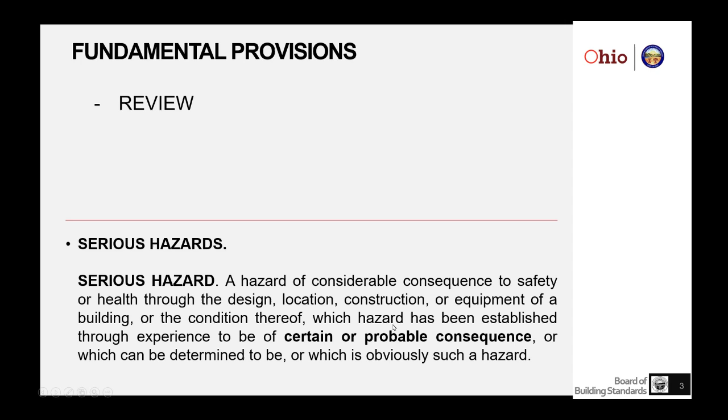Now, when we talk about serious hazards, we're going to have images that dance in our heads. We've shown a few of those examples, some of which some of you may have felt were a serious hazard, some of you may have felt they weren't. And if it's not a serious hazard but you're still concerned, we indicated that there is a tool you can use as part of the resource packet, both residential and commercial. It's called a notice of recommended change.

It's a notice of recommended change that says we've identified something that hasn't moved up to the level of a serious hazard. It might in the future. We want to put you on notice that this exists in your building, and we'd recommend you make these changes. We want to go on record as having noticed and notified you so that you understand the burden is now in your lap to address.

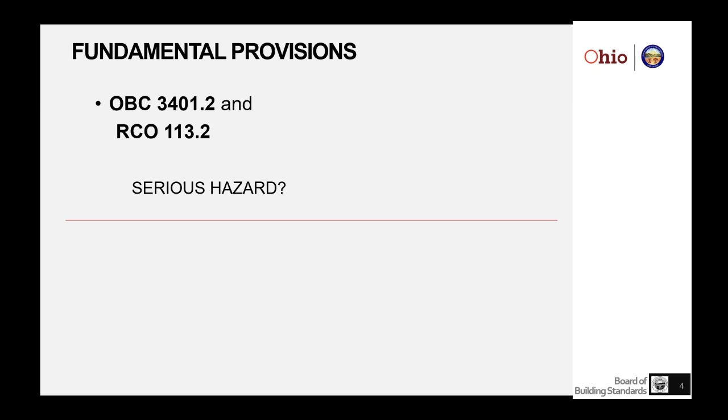Now, many things appear to be a serious hazard. Certain things are pretty obvious. If we know things about that, this may be a serious hazard. Sure looks like it could be. I have no idea what this is. And as an inspector, you probably wouldn't either.

We know that there are several feeds into this box, and it doesn't conform, depending on where it is, if it's energized, what it's used for. This would probably at least deserve a notice of recommended change. That's why inspectors, your cameras are important, and all this information needs to feed back to the building official so the building official can make a call.

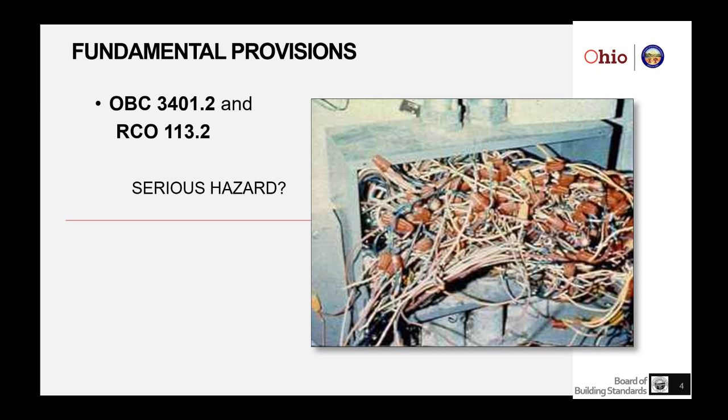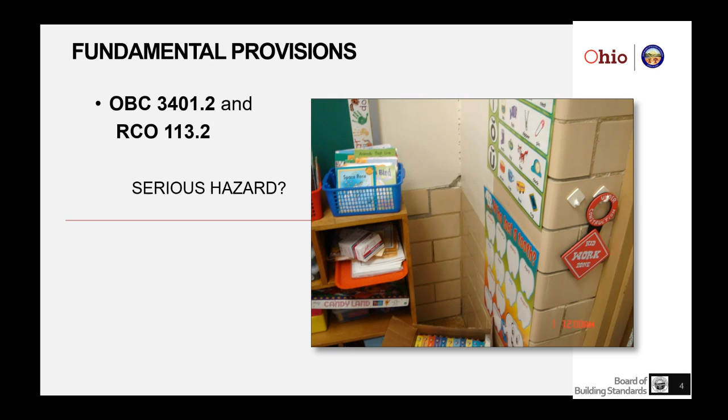You may be walking through a building and notice some pretty severe structural cracks and shifts. It may need some more investigation. Again, photographing some of these things, it may be a serious hazard, or it may reflect a condition that's already been addressed. It may not. And ignoring that could put the building department at some level of risk if it was noted, if it was discussed. So documentation and investigation get to be really important.

There are parts of a property that are outside the scope of the building code. Parking lot lighting, for instance, is not something we regulate. If you notice something, you may still wish to notify the owner of a condition that could be hazardous. This pole could be energized unintentionally and someone could be electrocuted. So there are things outside the scope of the code that could be hazardous that we may want to notify someone of, but we don't have the jurisdiction to issue orders.

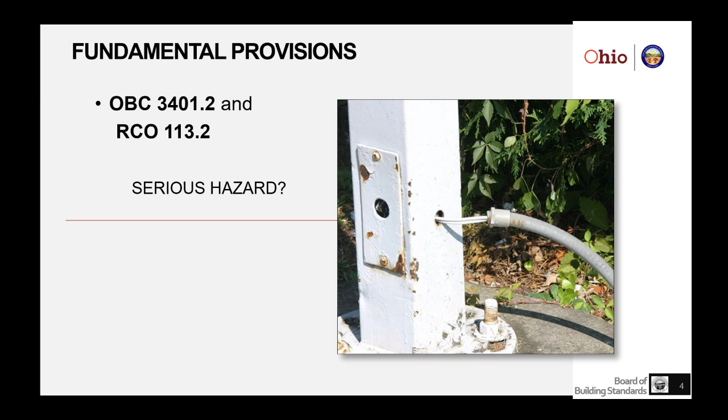There are things you're going to see in older existing buildings. This, for instance, probably should be insulated if it was new construction. You're going to see a lot of water staining and water damage. Depending on the extent of the damage, it could be a serious hazard, or it may not be. It may warrant a notice of recommended change. These are the kind of calls the building official is going to have to make every day. And you, as the inspectors, need to inform the building official.

It looks like those two vertical framing members are newer than the other framing members. Some work may have been done here for a reason. It may mean additional investigation is necessary to make a determination of whether there are serious hazards.

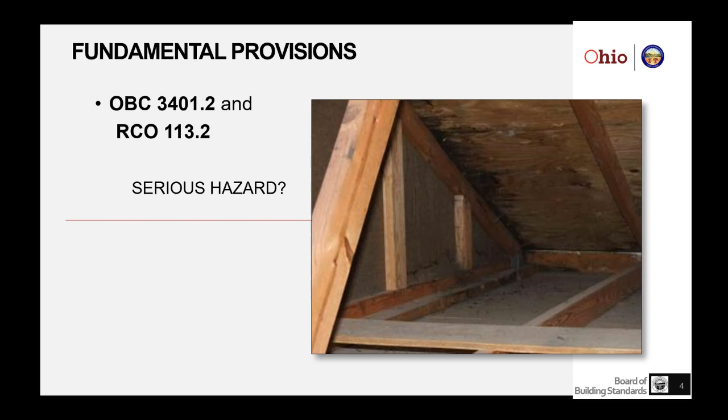There are all kinds of creative tradesmen out there, people who like to play electrician or mechanical contractor or structural contractor. But when we see these things, we need to document them, not ignore them, and in discussion with the building official, determine a course of action. No box—we don't know what voltage this is, we don't know what it's supplying, we don't know what the green wire is, though we know what green normally is and where it's going. Just too much information that's unknown. It may be that an order is issued, but it may be that there's a notice of recommended change, depending on the information we gather.

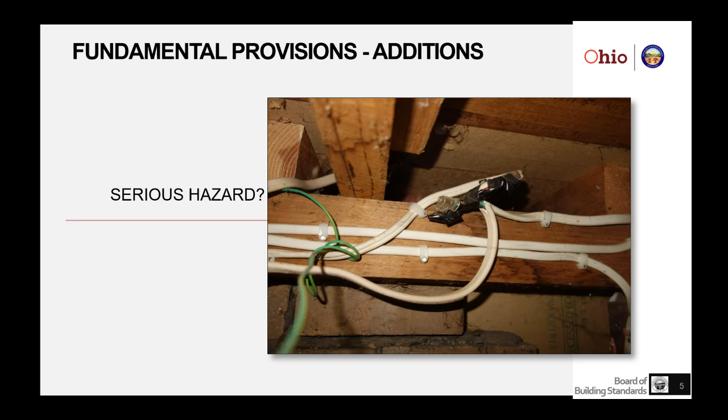Now, we want to start talking about some of the specific provisions in Chapter 34.

When we're dealing with building materials and systems, there tends to be a little confusion, and we just want to make sure you understand that existing materials can remain unless they're dangerous, unless they're damaged, unless they cannot function as they were originally designed—and then the owner needs to maintain, which may mean a repair or a restoration. But existing materials can remain.

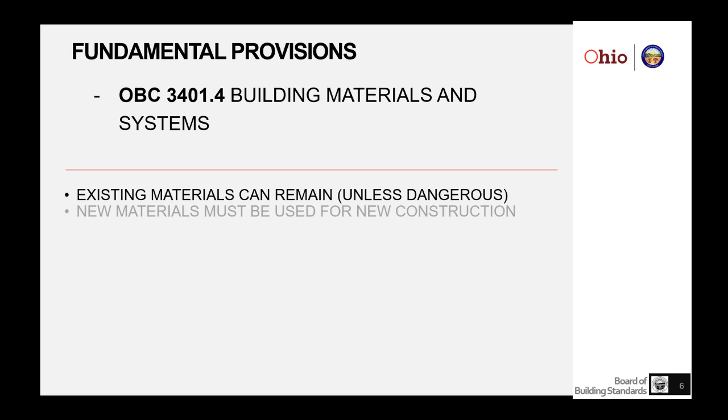Also, when there's new construction, new materials should be used. There are some provisions for used materials—if they meet the requirements for new materials, they're not hazardous. And the building official really gets involved here. Now, there are not many building officials that want to make a call on whether old materials comply with new material requirements, but understand that they can be used, though there's an approval process, and there has to be a determination by the owner or the design professional that they meet the requirements for new materials.

That's very difficult to do, but it is actually spelled out in 3401.4. Also, another issue that comes up periodically is lead paint and asbestos.

Now, some old homes and a lot of factories and older buildings will have asbestos in different places. They most likely have lead paint, but those are within the jurisdiction of the Ohio Department of Health and Ohio EPA. So if you run into a lead paint issue, turn that over to the Ohio Department of Health, or find out if your local Department of Health has a lead abatement program.

Contractors that do that work must test and get licensed to dispose of some of those materials. Same thing with OEPA and asbestos. That's not something we enforce. We can notify agencies of that type of work in existing buildings, but do not enforce the provisions of those other agencies. Sometimes that comes up and people don't know where to direct an owner. So just noting this, that for the lead paint, there's a lead paint program at Department of Health, and the asbestos abatement program at OEPA.

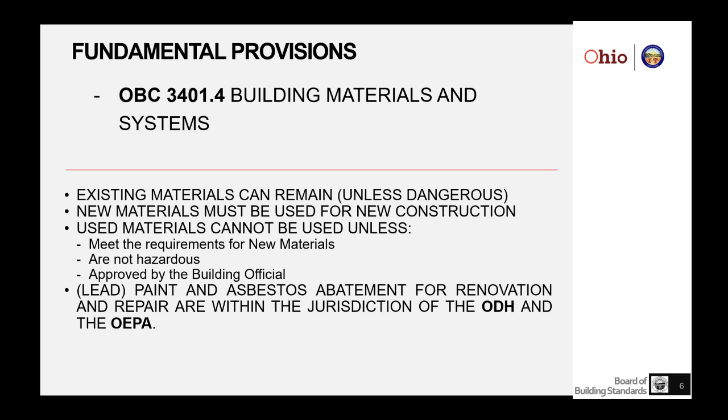I would also want to mention this: this is the only place the International Existing Building Code is referenced. It is used because there are some provisions in it that allow us to use that code, section 721, to determine the fire resistance rating of existing materials, these archaic and older materials. Designers can use that section to determine a fire resistance rating of assemblies and materials in existing buildings, and then come back. The design professional should, if they want to use existing clay tiles or ceramic tile wall assemblies in older buildings, go to 721 and use that section to determine the fire resistance rating of those existing materials.

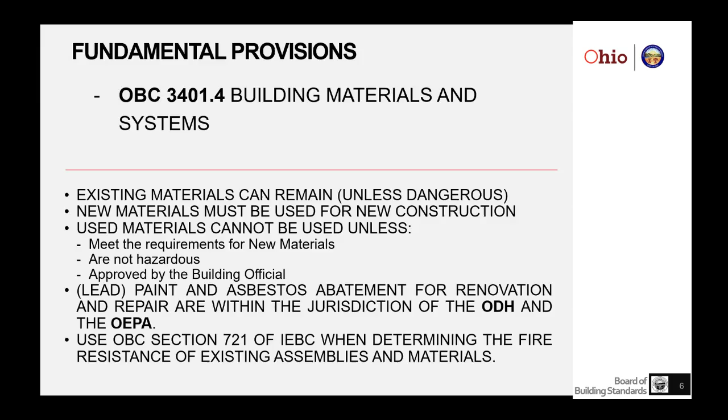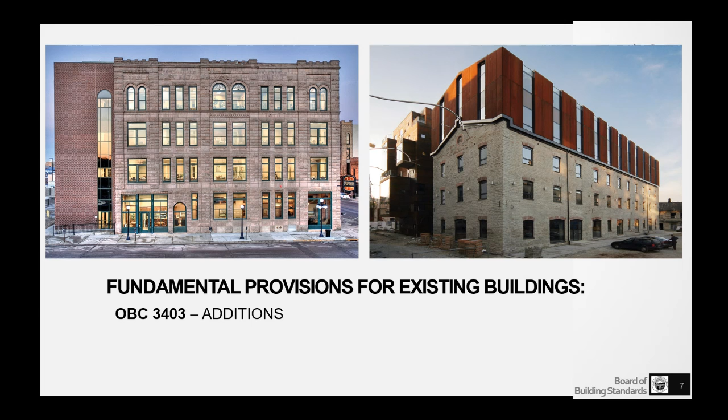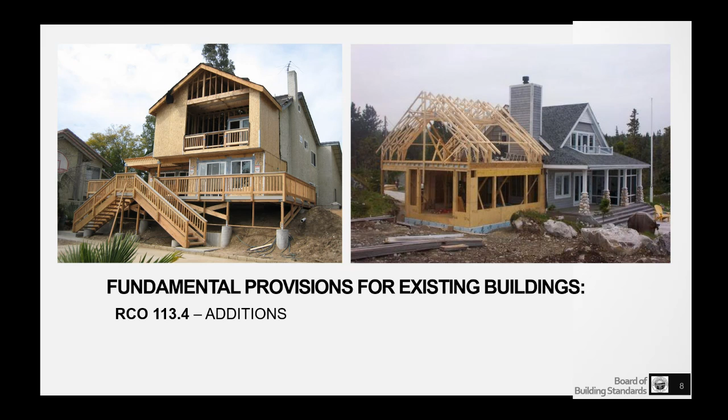And on the residential side, typically we see additions that are structures built adjacent to and added to an existing 1, 2, or 3 family dwelling. So this is what we're talking about in either 113.4 or in 3403 when we're talking about additions. So let's talk about that for a minute.

Existing buildings, additions. Both codes require that alterations and renovations in and additions to existing buildings comply with the current code, because that's new work. Those renovations and additions have to comply with new construction requirements because it's new work. And in an alteration, the code applies to the extent of the alteration, meaning only the new work has to comply.

That may mean, as odd as it sounds, that if I put in a wall section where I've removed one, and currently that corridor would have to be built as rated, that piece that gets put in would have to be done as a rated assembly, even though all the walls may not have a rating, or be of an archaic material that it's hard to determine the rating.

And remember, the concept of progressive compliance: over time, as more and more of that building is altered, more and more it will comply with more modern building codes. Additions, however, have to be made to assure that the existing building with the addition added on aren't less conforming with the code than before the addition.

And it gets really tricky when an addition covers an existing required means of egress. That path of travel has to be maintained. Travel distances have to be maintained. So the existing building can exist unaltered, doesn't have to comply with the current code, but that addition and that existing building can't be less conforming with the code than before the addition was added. And that, again, isn't a conflict with progressive compliance - what it is saying is that we can't make that existing building less conforming.

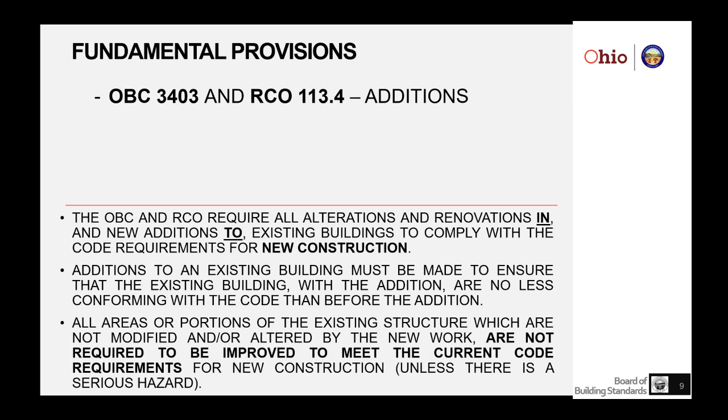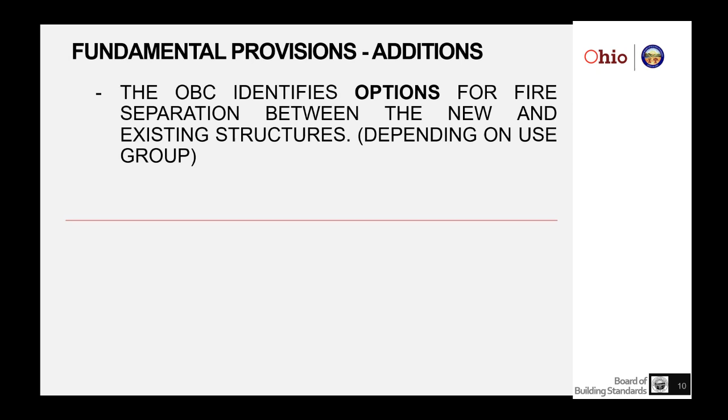Now, an owner has options, and we want to talk about some of those options. When we have an addition to an existing building, the options are varied. They can put a legitimate firewall in, and that is a structurally independent 3-4 hour wall that will stand even if the structure on either side collapses. It's a legitimate firewall - we've created a separate building, and we'll deal with that separately.

The owner can also just put in fire barriers between the existing building and the addition. Now, if they choose not to put a fire barrier in, there's no separation.

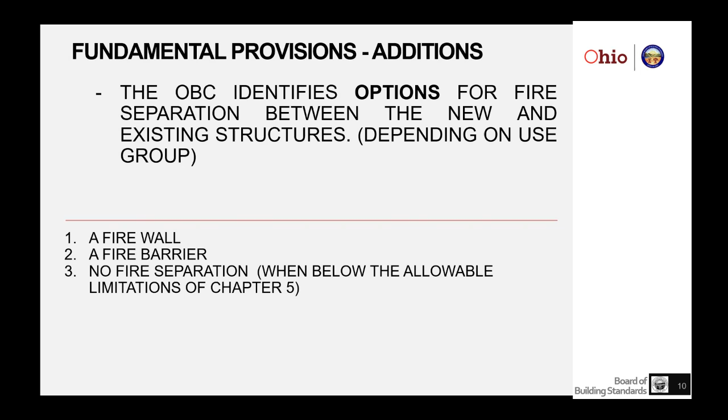When the allowable areas aren't exceeded, that one fire area may have to be treated as a single unit. Remember, this is complicated because of that old definition that was put in law of what a workshop or factory is. So we had to come up with a way of dealing with an addition to any of these types of occupancies, A, B, M.

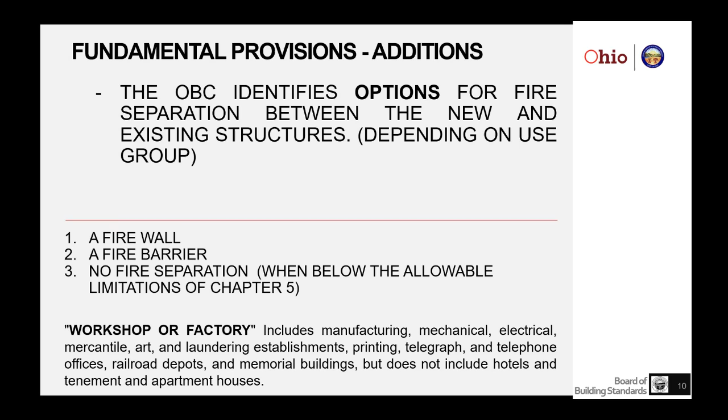That would allow us to put an addition on and not impact the existing building. So it was done in a very specific way in 3403 for additions, and you'll see in that section some Ohio language that was generated to make sure that our provisions for additions conform to what the legislature did in the law.

So what you'll find is a fourth option that says the combined height and area of the building, the existing building, and the addition will be used to determine the construction type of the addition. And the construction type of the addition must be increased to a type that is within Chapter 5 allowable height and area.

I will do something that the model codes have never allowed us to do, and that's mix construction types. But to make the existing building no less hazardous, we will count the height and area of both the addition and the existing building, enter the tables, and find out if the allowable area—we'll find out which construction type that area drives us to.

Given that we might have an open area perimeter increase, a sprinkler increase, we'll use those tables to find out what construction type could be built of that size, and then apply that construction type to the addition. Now that's for all the building types except sleeping occupancies.

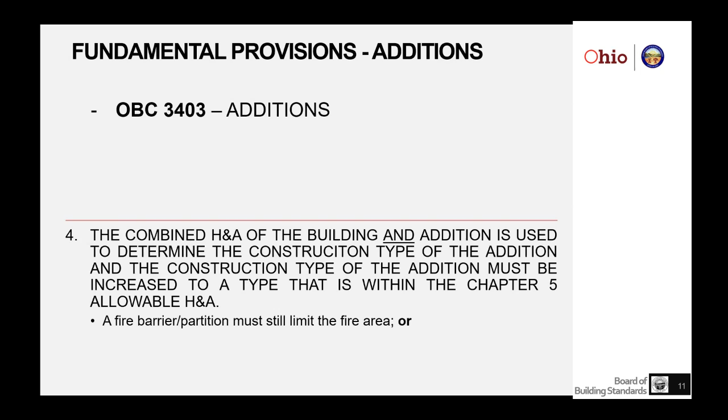We could put a fire barrier partition to limit the fire area, we may put an automatic sprinkler system in the fire area. And if the fire area extends a little bit into the existing building, that fire area must be suppressed. And we would put that sprinkler system in if the addition and the area of the existing building exceeds the Chapter 9 limits, but we will put that fire protection system in the addition.

And if the code requires it to be sprinklered throughout, that would be considered a building that was sprinklered throughout, and I can get the increases that the code provides for buildings sprinklered throughout. This is the only way we can comply with both the law and the model code's based code requirements.

Now, for those additions, when the height and area of the building and the addition is below the allowable height and area in Chapter 5, but it creates a fire area greater than the limits in Chapter 9, one of the following has to happen. So I don't have to change construction type, but if the area creates a fire area greater than the limits in Chapter 9...

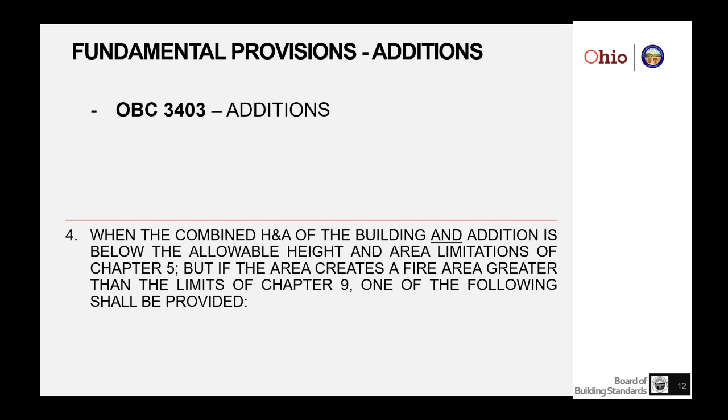I'm either going to have to put a fire barrier in to limit the fire area, or I'm going to have an automatic sprinkler system for the fire area that exceeds Chapter 9 limits. So we're still maintaining a level of safety. We haven't made the existing building less safe. And remember, we're going to have to preserve required exits, travel distances, all that kind of stuff is going to have to be maintained. This is dealing with just construction type and some of the requirements that apply.

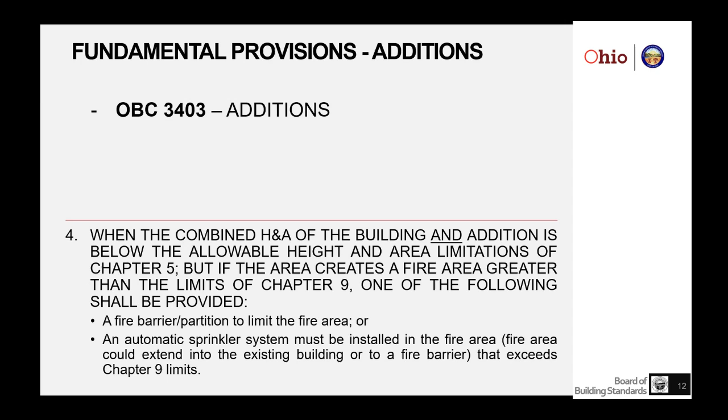Now, Steve, yes, quick question here. From Eric Shaver, who writes...

3408.1: if a building is required to comply with Chapters 3 through 13 and 14 through 33, can OBC 3411 be used to meet the accessibility requirements? Let me read that again to make sure I get the right sections. OBC 3408.1: if a building is required to comply with OBC Chapters 3 to 13 and 14 to 33, can OBC 3411 be used to meet the accessibility requirements?

That's 3408, that's change of occupancy. Right, and he said 3408.1. Right. Let's see, being directed back into the current code.

Well, first, in that section, the first thing you have to do is you're going to have to do an evaluation to determine if it's more hazardous or less hazardous. So we'll talk about that in a minute, but it's not automatic. You go to 3412 or some other way of determining whether it's more hazardous. And if it's more hazardous, Chapter 3408, the specific requirements for change of occupancy are going to send you out.

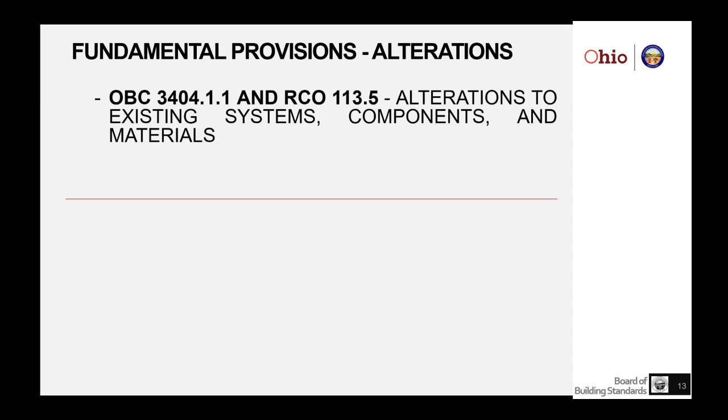There's also provisions in 3404 and the residential code that deal with systems, components, and materials. This is the building systems: HVAC, mechanical, electrical, plumbing. There are provisions in the code that allow the same provisions for systems, components, and materials as allowed for existing buildings, so you'll come over to the existing building code.

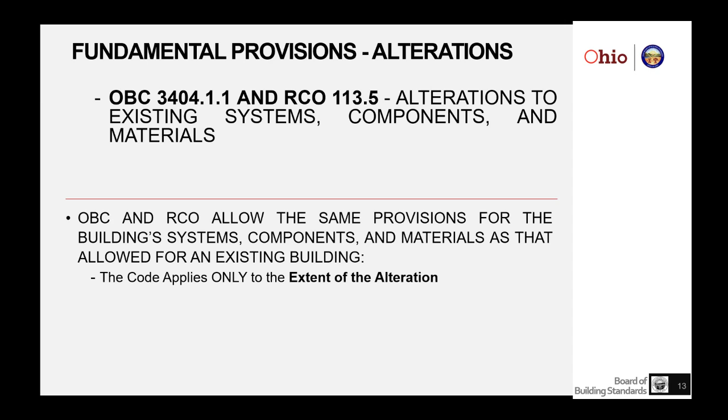Remember, the code applies only to the extent of the alteration. So it depends when we're dealing with alterations to existing systems, I'm going to apply that to the new work. The portions of the existing system which are altered or affected by the alteration are required to meet new code. If I have a heating appliance that cannot handle that increase, I may now be required to do something in addition to adding to the mechanical system. Same thing with electrical systems and circuits, again, to the extent of the alteration.

Not more hazardous than existed, and if the systems, by meeting the new code for the new work, can be deemed safe and sanitary. Again, it's a judgment call. The building official is going to have to be involved.

Repairs and maintenance are only required to be done with conditions of existing approval and the system isn't less safe. So repairs and maintenance are going to be treated a little differently. That's not necessarily an alteration, not necessarily extending the system. So depending on the extent of the alteration, maintenance and repairs are going to be dealt with differently.

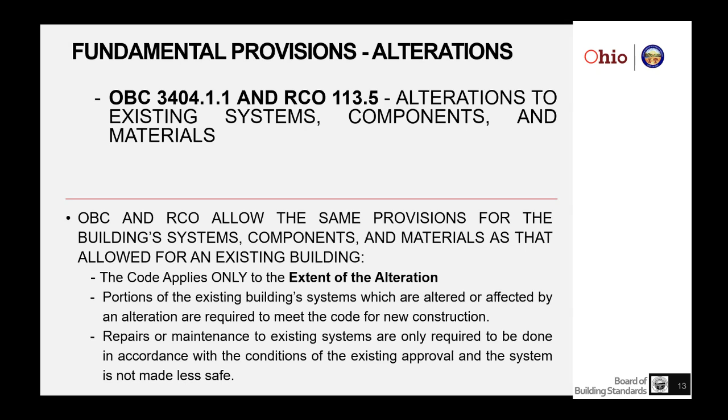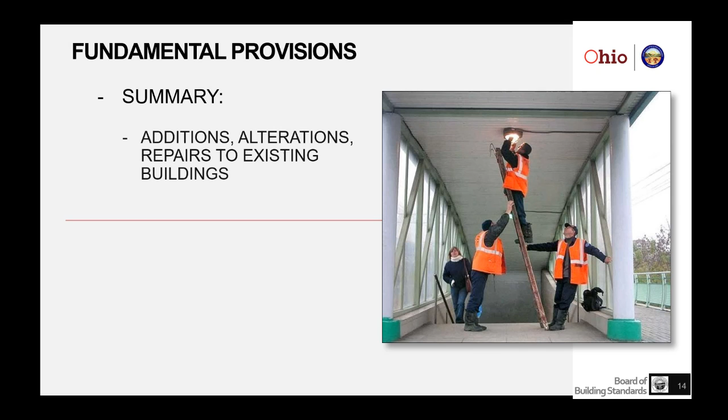Now, in summary, for what we've talked about so far, you can't protect people from stupid, but you can help them understand what the code requires when dealing with additions, alterations, and repairs to existing buildings. The basic premise is that things that are not modified, not altered, are not required to meet the current code unless there's a serious hazard. That's the byword when it comes to additions, alterations, and repairs to existing buildings.

Not required to meet the current code. They are required to be maintained. When maintaining those is impossible and new systems have to be installed, that's an alteration. But in any case, when there's a serious hazard, it's required to be remediated, and it can be restored to the previous condition it was in. It doesn't necessarily have to comply. It has to be made safe.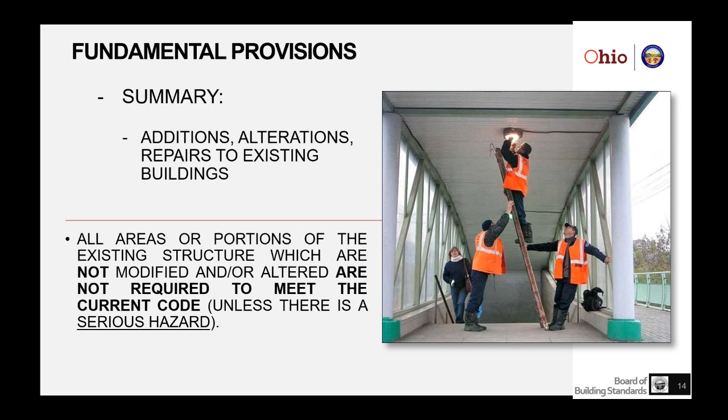Now let's talk about the complicated one, the change of occupancy. I don't know how good a job I'll do here, but I want you to understand specific things about change of occupancy, especially as we have to deal with that, almost one of the major changes that happens in existing buildings. It's the most difficult. A change of occupancy is a change in the purpose or level of activity. We talked about that before, this is a review.

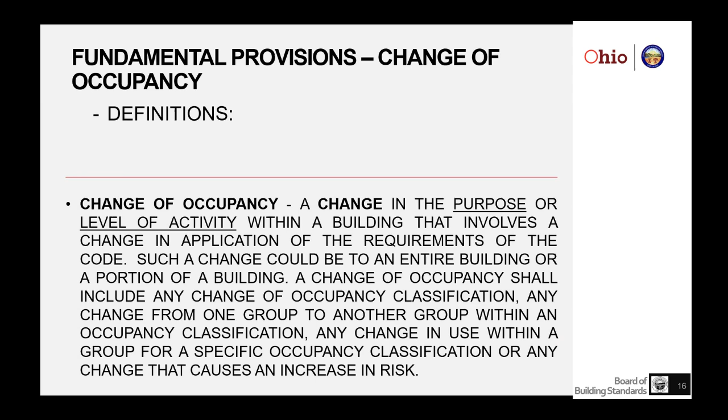There can be different types of change of occupancy: a complete change of occupancy, or a change of occupancy which would create a mixed occupancy situation that didn't exist before. The code makes it clear that a change of occupancy of an existing building or space is permitted without having to meet all the requirements in the code, provided, and this is the evaluation that has to be made, the proposed use is not more hazardous than the existing use, and you need to do an analysis.

We recommend or suggest you use 3412 to do that analysis. You may have an engineer do that analysis, or some other professional do an analysis to say is this occupancy more or less hazardous. For you building department people, you can read out of the code through its tables and charts what is considered more hazardous. If you go into the height or area table, and you see that one occupancy permits less square footage than a different occupancy with the same construction type, you know that's a more hazardous occupancy.

There are ways of reading out of the building code to determine whether a change to another occupancy is more hazardous than an existing occupancy. This provision would require that those increases in risk be addressed. If the proposed use is more hazardous, such buildings shall be made to comply with the requirements of sections 3 through 14, with 3412 as the only option. Doing that analysis is helpful, because you may do all the work needed to prevent having to go back to sections 3 through 14.

You're back, yay. Did that... when did I get dropped? You completely froze about a minute ago, and your program is no longer loaded. Yeah, and we're broadcasting live right now. Let me share this for you. Get it? Yep, got it, your program is live. All right, I don't know if we left off here or not, but we'll start here. Go ahead, you there? You are live and broadcasting. All right.

One of the things that is difficult is accessibility provisions, and we're not going to be able to do a deep dive here, but I do want to go through some provisions in the existing building chapter that deals with accessibility, because there are some real issues that come up. It scares people, they don't want to deal with it, and unfortunately this prevents them from adequately enforcing accessibility provisions. The federal government realizes that when it comes to existing buildings, there is a level of reasonableness that is different than Chapter 11 for new construction. So I just want to touch on some of the highlights so you understand how the rules address special conditions that exist in existing buildings.

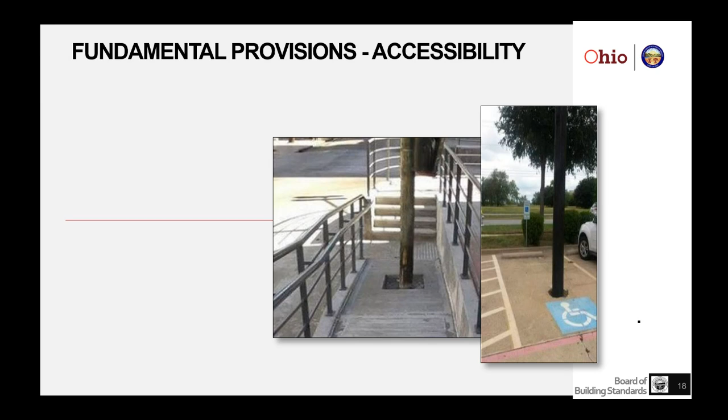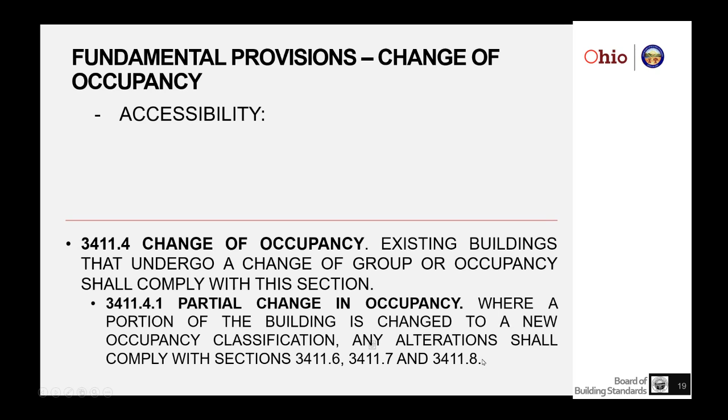So first, we're talking about accessibility. We have to deal with a change of occupancy. That's probably one of the most difficult areas when dealing with accessibility. The code says there are a couple types of change of occupancy: there's a partial change of occupancy where a portion of the building is changed, and there's an entire change of occupancy. I want you to notice these three sections, 3411.6, 7, and 8 - they are critical to understanding how to apply accessibility requirements for existing buildings. Keep that in the back of your mind. Not only a partial change of occupancy, but there's also a complete change of occupancy, where the entire building undergoes a change.

It's going to comply with 3411.4.1 and shall have all of the following features. Once we have an entire change of occupancy, the entire building has changed, even if it's an existing building, there are some things it's going to have. Even then, the accessibility requirements give you some leeway, but follow this, pay attention here, and I think it'll be helpful. First off, if it's a complete change of occupancy, then the building has to have several features.

One is at least one accessible building entrance. Look, they're gutting the building - they should be able to provide one accessible building entrance. This can be complicated if you're in, say, Over-the-Rhine in Cincinnati, or German Village, with narrow sidewalks, stone lintels and thresholds. There are some challenges, but when you're gutting a building, when you're doing an entire change of occupancy, there is an assumption that you have at least one building entrance.

There will be one accessible route from an accessible building entrance to the primary function area. Now, we need to remember we talked about primary function - we'll talk about that again a little bit. I've got to be able to get into the building and get through the building to the place in the building that it was built for.

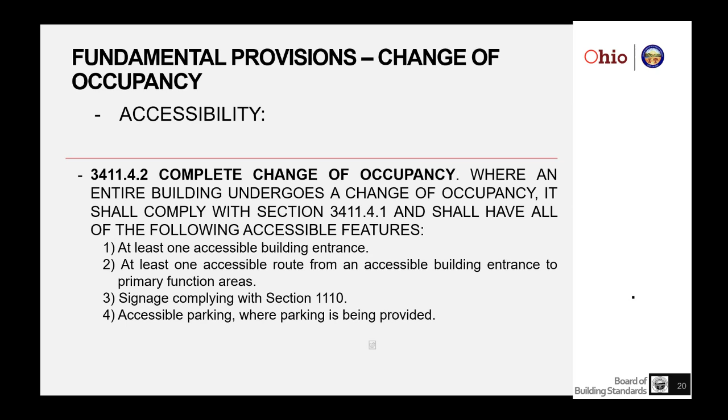Signage - we need to have some signage to indicate paths of travel and features. Where parking is provided, there needs to be some accessible parking. This is one of the few places in Chapter 11 or 3411 where we extend outside the building to some site feature: at least one accessible passenger loading zone when passenger loading zones are provided, and at least one accessible route connecting the accessible parking, the passenger zone, and the entrance. So there are some site features that kick in when I have a complete change of occupancy for a building.

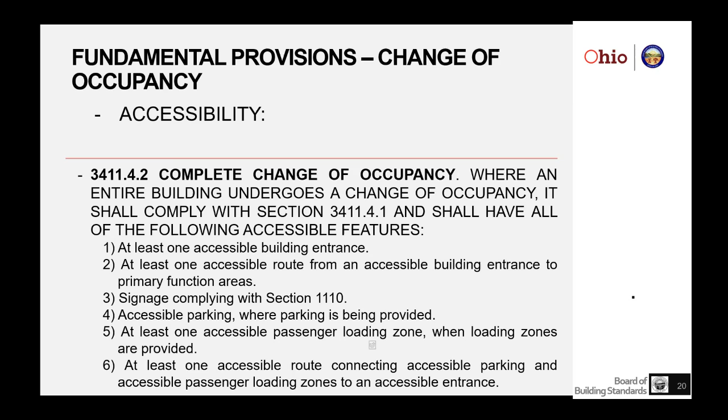Now, there are, for complete changes of occupancy, some exceptions, and this ripples through all of the accessibility requirements for existing buildings, and you've got to understand this term. We're going to define it in a minute, but I want you to see what is included in this complete change of occupancy, where it is technically infeasible to comply with the new construction standards for any of these requirements, the ones we just listed, for a change of group or occupancy. The above items shall conform to the requirements to the maximum extent feasible. Now that's going to be a discussion between the designer, the owner, and the building official. There is an exception for Type B units, but we won't go into that now.

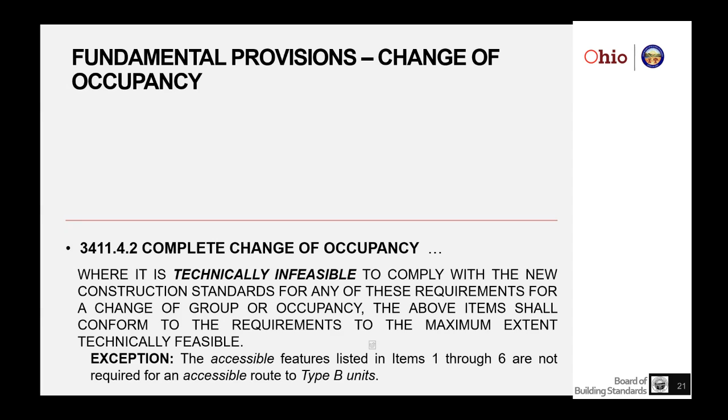The definition: what is really technically infeasible? Here's how the building code, the accessibility standards, define it. That's an alteration that you really can't do because the existing structural requirements really prohibit you from making the changes you need to make, or there are physical or site constraints that prohibit the modifications of the features needed to bring this into strict compliance with those provisions for that complete change of occupancy.

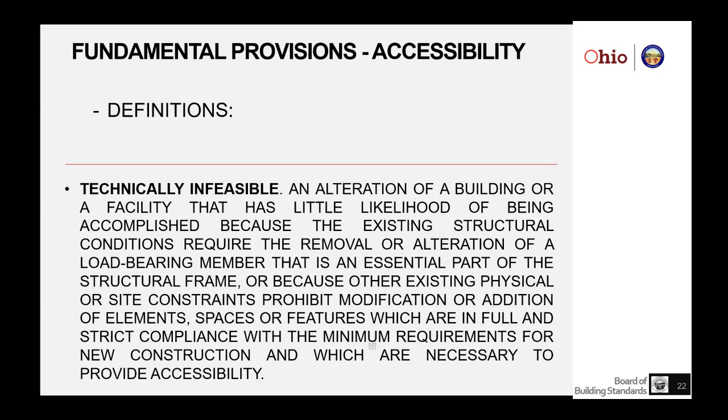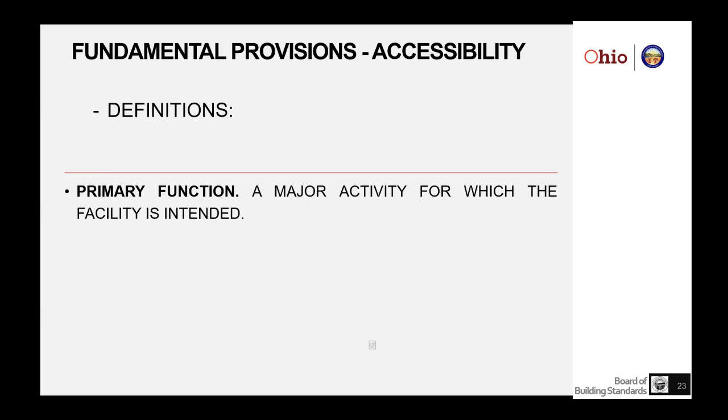There's also this definition of primary function, a major activity for which the facility is intended. I wanted to give you some hints that came out of the accessibility laws. Areas that contain a primary function include the service lobby of a bank, dining area of a cafeteria, meeting rooms in a conference center, as well as offices and other work areas in which the activities of the public accommodation or private entity using a facility are carried out. Not all of the building will be considered a primary function, and therefore those areas won't require accessible features to be added, such as boiler rooms, mechanical rooms, lounges, janitor's closets.

Now I have to get access to that primary function from an accessible entrance along an accessible path of travel, but these rooms are not considered areas of primary function, and similar things like that.

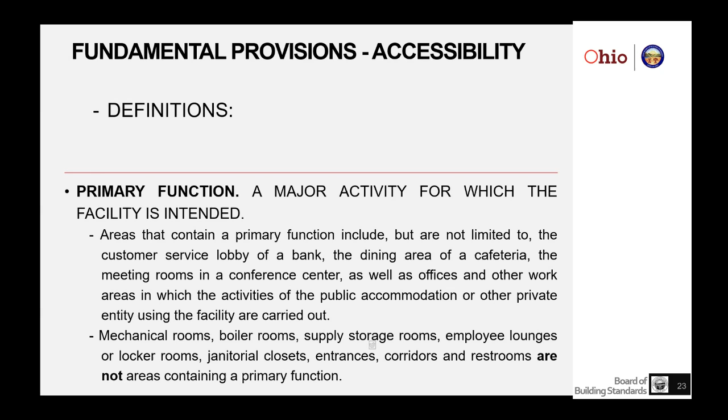Now when we do an alteration, they have to comply with the applicable provisions in Chapter 11 of this code unless technically infeasible. And where compliance with this section is technically infeasible, the alteration is going to provide the accessibility to the maximum extent technically feasible. Chapter 11 is kind of a scoping chapter, and if we get sent out to Chapter 11, we're going to use that. But when I alter something, it's an alteration that the new code applies to, and I may have to alter in existing buildings to comply, and there are some exceptions. So it's not a carte blanche requirement.

For instance, this toilet room that's highlighted may be technically infeasible to enlarge in size because I've got shafts, stairs, corridor widths are set. So I'm going to adjust that toilet room to the maximum extent feasible, and that's deemed to comply in an existing building. I'll put grab bars in. I may protect the underside of the lavatory with some anti-scalding baffles. The toilet can be adjusted, but I can't enlarge it to get my turning radiuses and things, so I'm going to make it accessible to the maximum extent possible.

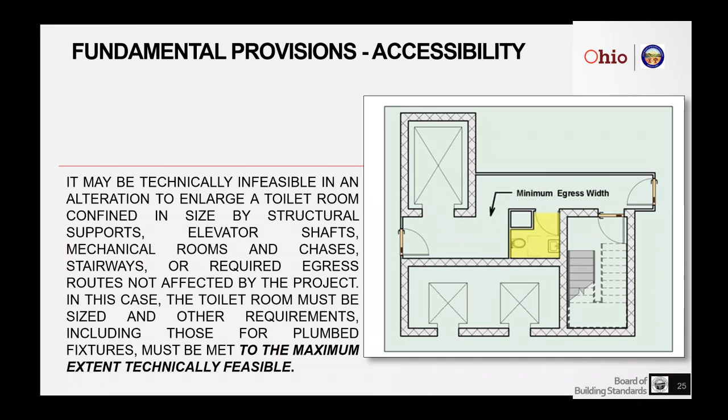When we're dealing with conflicts, oftentimes there are building, plumbing, and other life safety and other codes. For instance, let's say I'm going to try to combine 2 toilet stalls to create an accessible stall, but now my plumbing fixture count's off. Well, that would be technically infeasible because the plumbing code does require a certain number of fixtures for a design occupant load. Now, I can't adjust that as a building official when it comes to fixture counts, but that's something that's going to have to be worked out between the building official, the designer, and the owner.

But those conflicts may prevent that project from complying literally with some of the accessibility requirements. Certain parts of the state, Eastern Ohio, where I grew up, Southern Ohio, where there are sites located on steep terrain, and it's difficult to get the grades and slopes that are needed. Possibly then it could be deemed not feasible, and you want to be careful about those, but you want the design professional and the owner to explain how those requirements can't feasibly be met.

Also, if it impacts the structure, including the floor, those essential components can't be altered, you could deem that requirement to be technically infeasible.

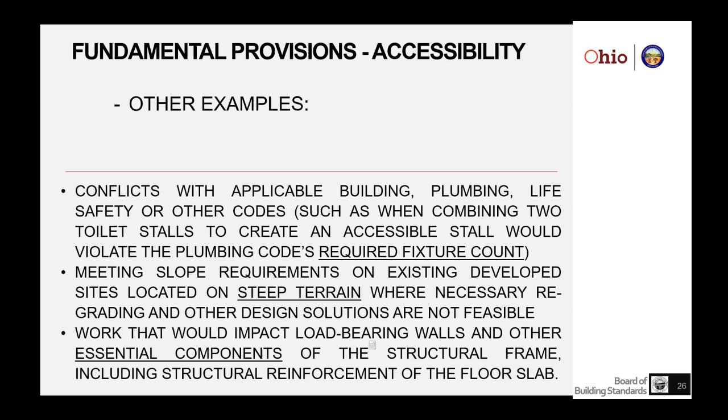And alterations, when I alter space, the altered element or space is not required to be on an accessible route unless required by 3411.7. Remember, that's one of the sections I told you to remember. The accessible means of egress required by Chapter 10 are not required to be provided in existing buildings and facilities.

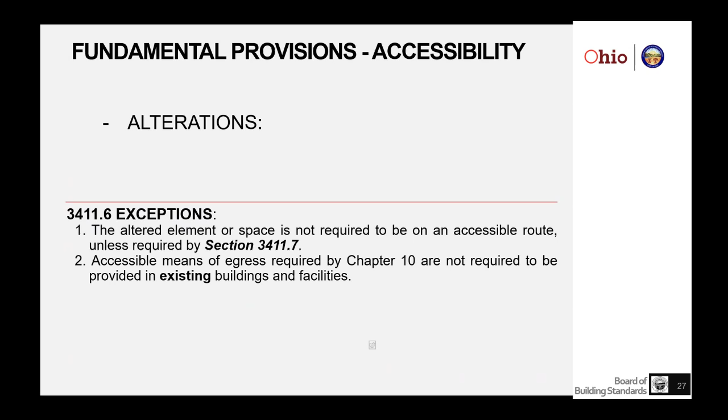The alterations to Type A individually owned dwelling units within an R2 can meet the Type B requirements—they're private residences, individually owned, like a condo.

And Type B dwellings or sleeping units—let's see, is this... I'm sorry.

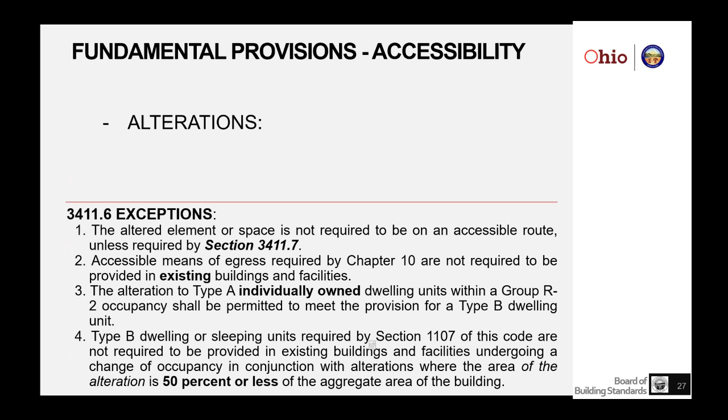In alterations where I'm not replacing 50% or more of the aggregate area of the building, I'm not going to be required to provide those Type B dwelling units in an existing building. So there are some numbers you're going to have to evaluate, and the designer is going to have to provide documentation when we're altering existing buildings. Those are accessible units that trace their history back to FHA, Fair Housing Amendments guidelines for dwelling units.

Now, alterations that do affect an area containing a primary function—this is the type of alteration to a bank lobby or to offices in an office building, where it affects accessibility to or contains an area of primary function. I've got to get to it, and the amenities along the way. I've got to provide accessibility to the primary function, access to it.

Including toilet and drinking fountains and those types of things. But again, the feds realize that can be very difficult in an existing building. So what I'm going to explain to you now about providing an accessible path of travel to an altered area containing a primary function, you can get relief from, but it's a very specific process. Say, in this existing building, I want to do some alterations. It's a small office building.

It's been there for 60 years. I want to alter some of the offices. I don't have an accessible entrance. I don't have an accessible route. I don't have accessible amenities. And the code would require those to be added. But the feds and the accessibility advocates realize that's one of the most difficult times to require accessibility. So there are exceptions to it, and a process to use.

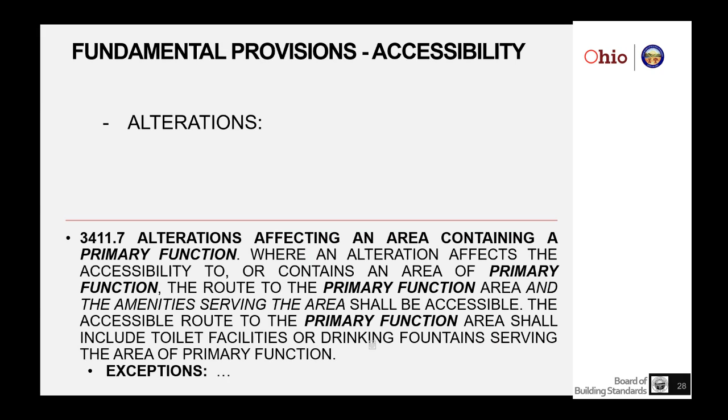Let's look at that. The exceptions are when the costs of providing the accessible route are more than 20% of the costs of the alteration affecting the area of primary function. So basically, we have to do an evaluation and say, I'm modifying these existing offices, and the accessibility requirements require me to get there, to get into the building and get to those primary function areas. If providing that accessible route exceeds 20% of the cost of the alterations to that primary function, I have an exception, because that's a disproportionately high cost.

There's no expectation that I would spend more than 20% of the project, because in all likelihood, an owner may choose not to do the project at all, and now we know there's even less accessibility to a building that provides public accommodation. So to determine proportionality, when it's disproportional, that's where section 3411.7.1 comes in—and that's why it's important, with all the sections that surround it.

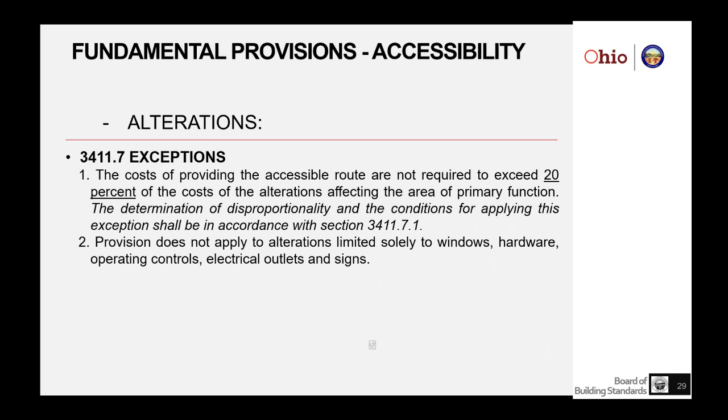There are certain things I don't have to count. These provisions don't apply to windows, hardware, operating controls, electrical outlets, signs—I don't have to deal with any of this if that's all I'm doing. And it doesn't apply to alterations solely to the mechanical systems, the MEP systems, fire protection. That's something I can do, and really there are no accessibility requirements that get triggered.

And it doesn't apply to alterations to increase accessibility to an existing building. Let's say I want to just provide an accessible entrance—I don't have to get involved in all this. If I'm making the building more accessible, that's an acceptable alteration, and I don't have to go any further in the building. Now, again, there's a Type B exception.

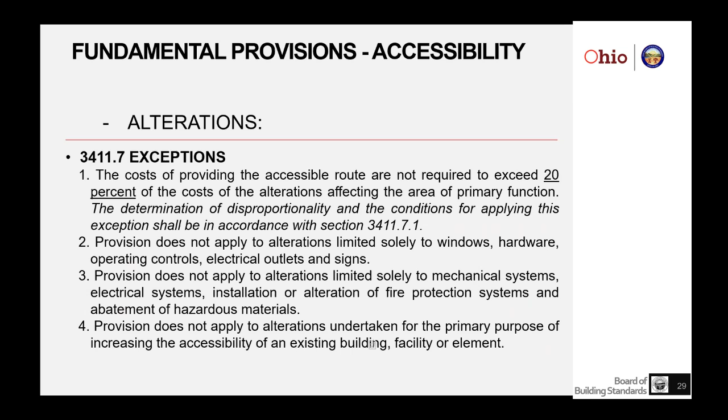Now the disproportionate cost and the alternative compliance—there are requirements that alterations made to provide the accessible path of travel to the altered area will be disproportionate to the overall cost, and there's that 20% cost again. And here's the key to this section, 3411.7.1: the determination of disproportionate cost shall be made and applied in accordance with the following. So I'm going to alter some space in a building that is a primary function.

3411 says you've got to also make an accessible entrance, an accessible route to that primary function, and you have to make the amenities, the toilet rooms, the phones, all that accessible, the drinking fountains along the way. Now, the codes understand that that can be a very difficult thing to do, and it could be very expensive to make those alterations to that accessible route.

So if you want to declare something a disproportionate cost, meaning I can't do all that, it would cost too much, more than 20% of the work I'm doing, so I'm just not going to do the project. So the model codes and the accessibility requirements say that when you say something is disproportionate, here's how you're going to apply that requirement.

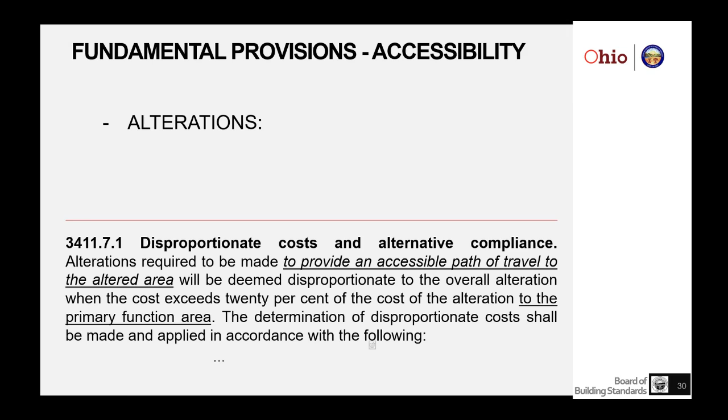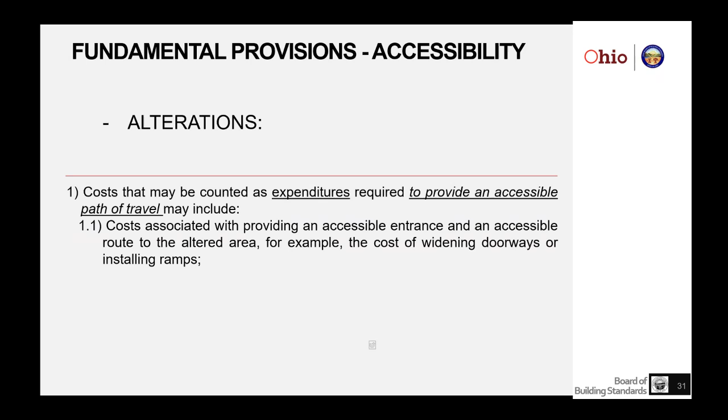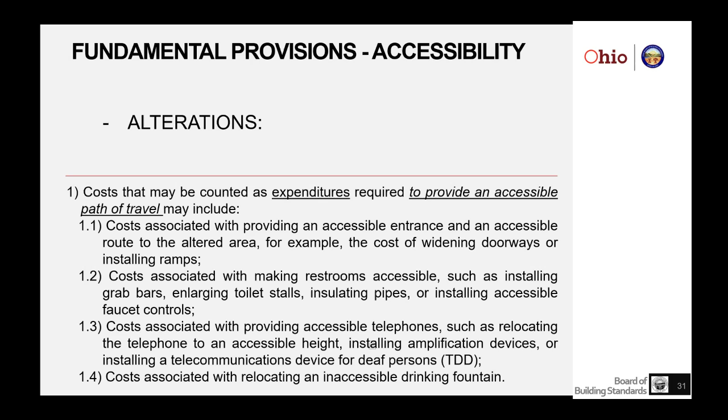The costs that will be counted as expenditures required to provide an accessible path of travel include these things: the cost associated with providing an accessible entrance and an accessible route to the altered area, for example, widening doorways, installing ramps, making restrooms accessible, like grab bars, toilet stalls, insulating pipes, the cost associated with providing telephones, amplification devices, costs with relocating inaccessible fountains. I'm going to add that cost up, and I'm going to say, is that amount more than 20% of the cost of creating the alterations in the primary function?

And Steve, if it is, we have a related question on that. Yeah.

The question is, in the definition of technical infeasibility, I have never read the violation of another portion of the code as being a reason to determine technical infeasibility, such as the plumbing fixture count. Am I correctly understanding that this is a factor of consideration?

Your suggestion appears to reflect on the old technical infeasibility definition in the ADA. Yes, what we have in our building code and in the ANSI A117.1, I believe, is that providing accessibility, they don't want it to conflict with other requirements that are spelled out in other codes or standards. And again, we could have some discussion about that afterwards, but that's my understanding of the intent of that section, and that in existing buildings, we don't want the thing to have less of those health and safety features and trade that off against an accessibility requirement for losing a toilet stall versus

providing one from those two. And I think that comes from the Access Board. I think I got some of that information from the US Access Board. We'll talk about that though.

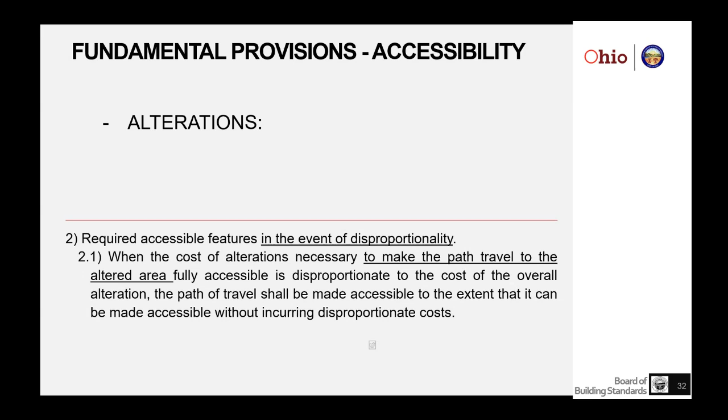And in the case of a disproportionate cost, to make the path of travel fully accessible, then I have to do something different. I'm going to make it accessible to the extent that it can be made accessible without exceeding that 20%. And the code even gives you some explanation in choosing which elements, do it in this order.

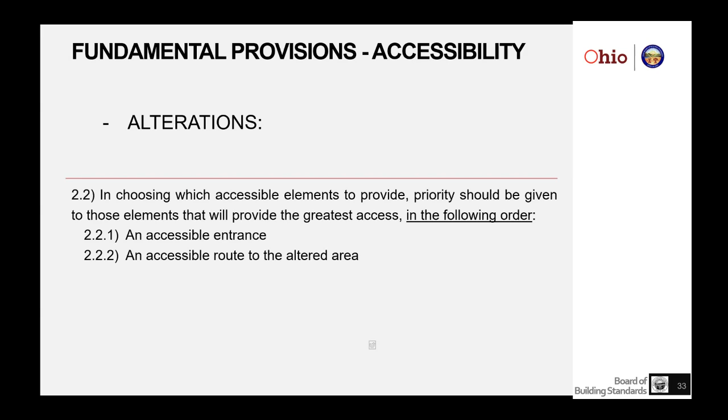And so it's going to tell us if you have 20% of those dollars to spend, then spend them in this order. First, get me into the building. I want an accessible entrance, and then when I have dollars left over, provide an accessible route to the altered area. If there is dollars left over, at least one accessible restroom for each sex or single unisex restroom, to the extent possible. If there are dollars left over, then we're talking about accessible telephones, drinking fountains.

But you'll notice that the alterations to an accessible restroom is third on the list. The idea is that I have an accessible entrance as primary importance, and then the accessible route to the altered area. And if I'm spending more than 20%, put the accessible entrance in, and then spend as much as I can, as I have left, on the accessible route. And if there are any dollars left over, then we can apply that to the toilet rooms.

That may mean it could only be grab bars, protection of the piping under the lavatories, and spend those dollars that way, so that it isn't disproportional. You'll still be able to go ahead and do the alteration to the primary function, but recognizing that in an existing building, it's very difficult

to make these changes. So the code gives you a hierarchy, helps you determine how to develop the cost, how to evaluate the 20%, what can apply to the 20% and what can't, and then an explanation of how to spend the dollars. Any questions so far, Meg?

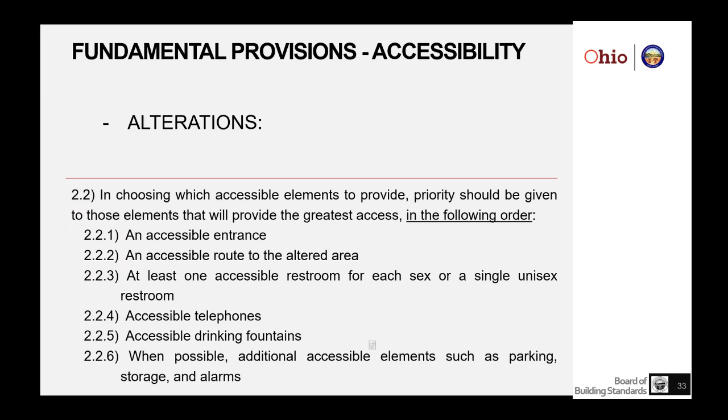There is actually a provision that says the obligation to provide an accessible path of travel may not be evaded by performing a series of small alterations to the area served by a single path of travel if those alterations could have been performed in a single undertaking.

Additionally, if I'm altering an area of primary function and I do more changes within 3 years of the original alteration, now I've complicated things a lot, because now I have to include the cost of the alteration to the primary function for the preceding 3 years to consider whether it's disproportionate. So now I'm going to have a lot bigger number to find out what my 20% is.

So you're actually kind of penalized if you try to play those games. A series of smaller alterations is something building departments really need to track carefully—your records are going to be very important to track the number of alterations in a building that affect an area of primary function, so that we don't game the system and do a series of smaller alterations, thus making the building less accessible rather than more accessible. Good question. Anything else, Meg?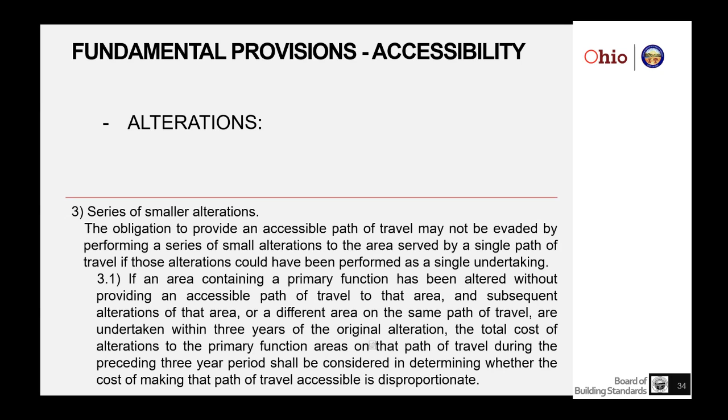So you can't do a series of smaller alterations to kind of avoid doing things to make the building accessible. Okay, there was one more that I think is topical here.

For an addition onto an existing building but a lower construction class, where does it say the building has to comply with the lower construction type?

Well, you're probably never going to decrease the construction type for an addition. Unless you put a firewall in where you create two buildings, you may be able to use a different construction type. But generally, you're going to at least use the construction type of what's there, because remember, you're going to compare the height and area of the existing plus the addition. Chances are, if you stay within those tabular areas, you would stay in the tabular area for the same construction type. It's only when the area exceeds what's allowable when you add the existing building and the addition that you would bump up the construction type for the addition so that the combined height and area would fit in the allowable areas.

So I don't know, I hope I answered that question. I think Tom Vanaver can have a conversation with you about that one. All right, moving on.

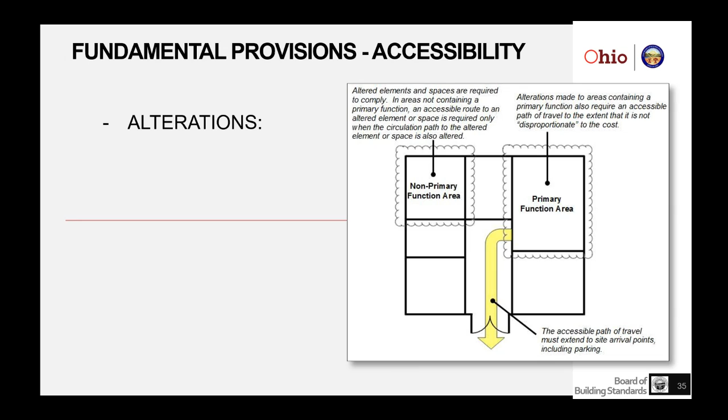A restroom project involving alterations to the toilet, grab bars, faucet controls, and mirror, but not to the other elements in the toilet room, can remain unaltered. So as long as the things that I do, to the extent of the alteration, it has to comply. The Access Board is saying: look, we know there are times when it's difficult to make that toilet room comply. But if you want to make it more accessible and you raise the toilet, add grab bars, change the mirror, and change the controls on the lav, all of those things increase accessibility. The scope of work would be just those things, and if those things comply, that alteration is acceptable.

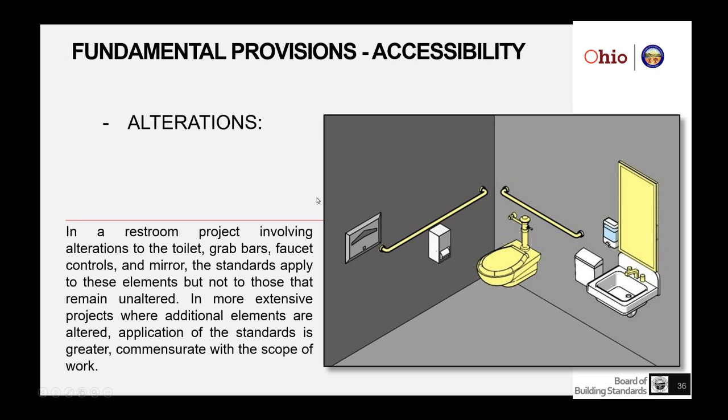Now the scope—when we talk about alterations, just realize, like exceptions to the general requirements, there are some scoping provisions for specific parts of an existing building when they're used: entrances, elevators, jury boxes and witness stands, dressing rooms, fuel dispensers, thresholds. Those things have specific requirements that are scoping provisions. Don't ignore those—that's 3411.8.1 through 8.15. So there are 15 items that it speaks directly to when we're doing alterations.

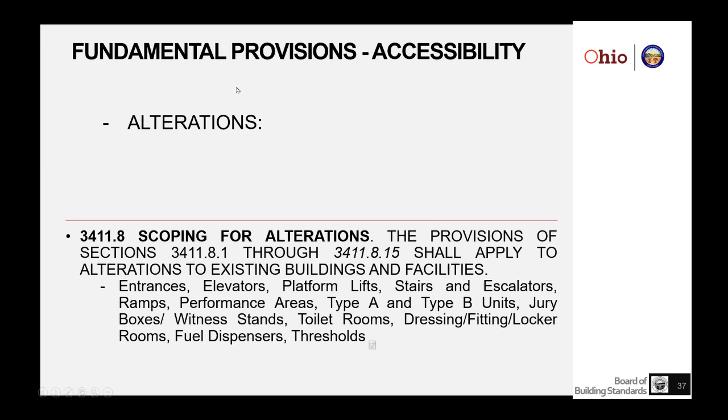If I'm going to put that entrance in, I'm going to look at that section on the accessible entrance. If I've got a toilet room, I'm going to look at those provisions for the toilet room when I put them in, understanding that there's a trade-off between the extent of the work, as I just showed in the slide, and some specific requirements as we've explained it.

And then there's 3412, and this is intimidating for a lot of people. I know there are a few architects and engineers that use it and use it well. 3412 provides us with two things: it provides something that's totally alternative to using 3401 through 3411, and is an alternative to using chapter 2 through 33.

It is an evaluation method that I can use for any building, and I want you to understand that these requirements in 34 only apply to buildings built before 1979. And there's a reason for that break. Now, I can use 3412 to evaluate any building to determine whether the occupancy is safe the way I want to use it, as an evaluation method. But if I want to use it as an alternative method to analyze a building, I can only use it in buildings that were built before 1979.

And as I said, there's a reason. In 1979, we began using, in Ohio, the BOCA Basic Model Building Code as the basis for our code, and we stopped using the Ohio homegrown, home-written building code that had been in place since 1954, I believe. Once we started using more modern building codes, there's a fairly good, consistent product, and the alternative compliance is more applicable to those buildings that were built prior to '79, when it was a local state-written code, and we don't want to deprive somebody of the use of their asset. We don't want to require those buildings be razed.

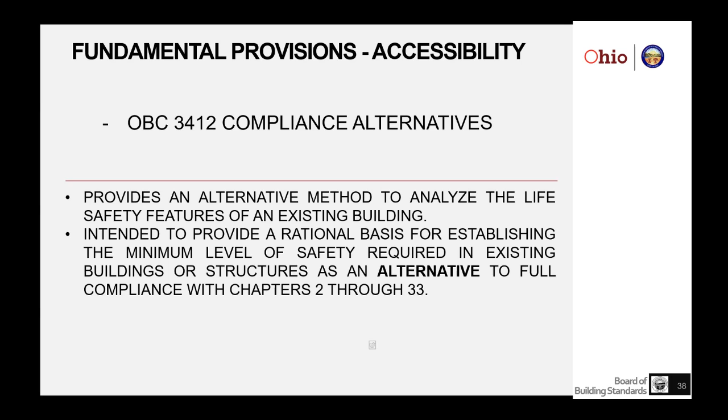And it's intended to provide a rational basis for establishing a minimum level of safety as an alternative to complying with the building code for new construction, which isn't fair, since that building, if it's been maintained as it was originally approved, and now we want to make some alterations, I'm going to do an evaluation. And if I can show through a rational, reasonable basis that my safety score in this building is at least as good as the mandatory score that the code has, then it's acceptable. As I said, it's limited to buildings built before July 1, 1979, the effective date of the BOCA-based first Ohio Basic Building Code.

It's a numerical system to comply with the intent of the code as an alternative to complying with all of the provisions in chapters 2 through 33, or in those specific provisions in 3402 through 3411.

Hey Steve, there's a question from the audience: why is I-4 exempt from 3412.2?

I'll have to look at that. Here's the thing to be very careful of. You may not be aware of this, and we'll work with you. Our rules picked up some fixes that we missed when we updated 3412. So if you call myself or Deb Oler, we can look at the proposed rules. All the proposed rule changes and fixes have been kind of put in limbo because of something the legislature is doing right now. So there may be a fix that explains that particular situation, but we can work with you to help sort that out, or there may be a reason, and that's why we're trying to put together that chapter 34 commentary, specifically to help with some of the 3412 section questions. I don't know if that's a good answer, but that's kind of where we are.